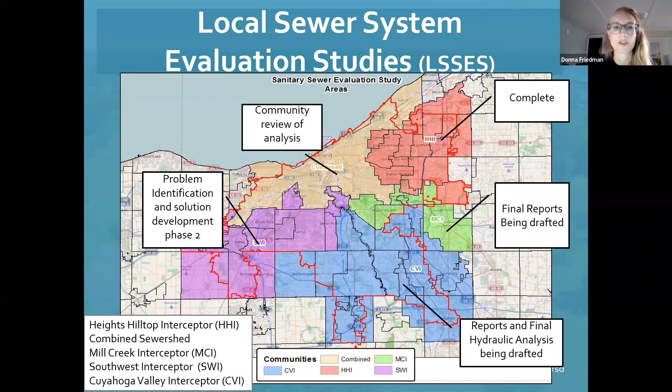These documents will also help provide some of the needed data to apply for the member community infrastructure grant dollars in future years.

Moving on to the member community infrastructure program, our funding for this program, which is within the wastewater budget, was reduced for the 2021 awards to $2.5 million. We are currently tracking a revenue decline due to COVID-19, and we'll be monitoring that as the year rolls on. There were 7 projects awarded for 2021.

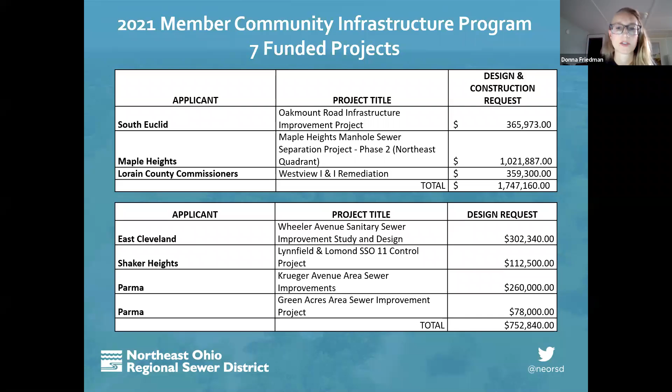3 were the classic MCIP design and construction application, and 4 were the newer type of application for design only, for projects that needed further vetting and investigation. If you did apply for funds for 2021, you should have received this information shown on this chart via email. These were the projects that were funded based on our scoring for this round of applications. We encourage you to continue to apply if you did not receive funding in this round.

We do anticipate funding of MCIP in 2022, and that will be determined by the rate study, as Frank was talking about. We also plan to continue with both application types. It seemed to be successful, and we got applications for both types, so there will be the design and construction and the design only option moving forward.

As always, if you have any questions about these slides, about community cost share, or SSES, your watershed team leader is your best resource. That'll either be me, Jeff Jowett, or Myron Borchards, and we're available to help you. My contact information will be at the end of this presentation.

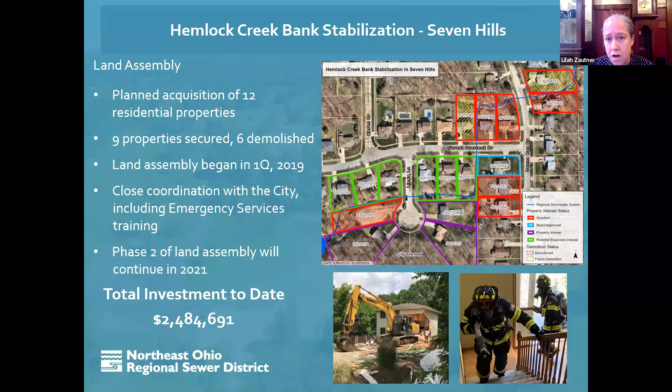So as we do land assembly in your neighborhoods, if you are interested in those opportunities, please reach out for us to consider that. Thank you. I'll now turn it over to Paul Kovalcik. Thank you.

Thanks, Lilah. Just to give you an update on how we help grant projects. In the past, the district has used stormwater funds to help leverage state and federal grant money to benefit the regional stormwater system.

Specifically, we made it a practice to provide grant funding or match funding for grants. This includes, but isn't limited to, EPA 319 funding, Sustain Our Great Lakes funding, Clean Ohio funding, and Coastal Management Assistance grants. For 2021 and beyond, we want to formalize the process for distributing matching funds for grants. We've designated $500,000 in matching stormwater funds available for grant-funded projects for 2021.

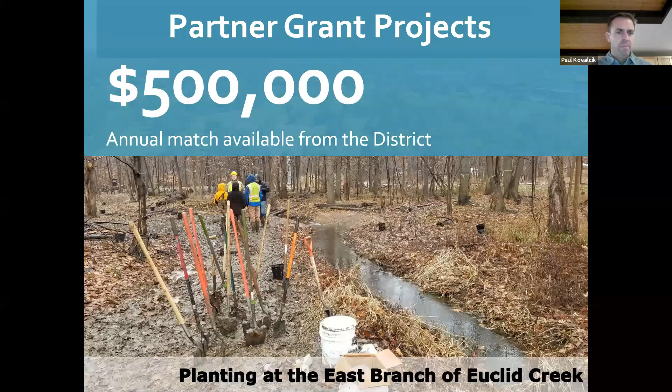We'd like people to keep their requests under $300,000 for each individual project.

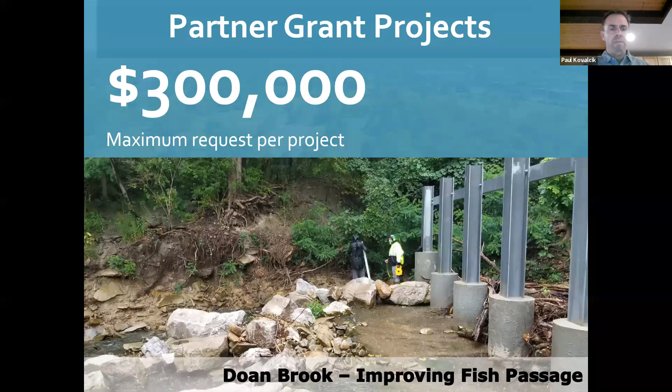What we'd like to see in each application package is a good project summary with some anticipated outcomes, a cost estimate with line item and unit costs and total cost of the project, a concept graphic showing the work area, hopefully along the regional stormwater system, and the dollar amount you're requesting from the district. You can use the 9-element summary sheets from the 9-element non-point source implementation plans as a template for your application. This is required for 319 applications anyway, but we'd like to see a little more detail from the cost estimate and project summary standpoint.

And then email it to me by the end of this year.

What we will do is nominate each application to our stormwater construction plan and rank them in our typical scoring system. Funding will be distributed according to rank, and we can be available to assist with developing concepts, sediment estimates, QHEIs, those sorts of things that might be necessary. We can provide in-kind services even if we don't award funds.

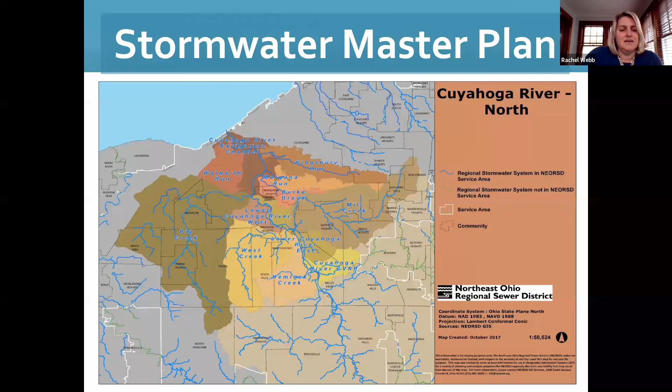Thanks, Paul. So Stormwater Master Plan, Cuyahoga River North. Just to give you an idea, it is done. Started in 2017, we are done now in 2020. I think with resounding success. I'll go into some more detail there.

We are 3/4 of the way done with our stormwater master planning for our service area. Rocky River is set to complete in November, leaving only the Chagrin River and Lake Erie direct tributaries to complete in 2021.

We ended up in the Cuyahoga River North Master Plan with 70+ problem areas. You can see a rough outline of those problem areas across the north boundaries there. All of those problem areas were nominated to our stormwater construction plan this year for scoring and ranking. So they're all in there.

It is a heavy lift. We're talking about over $500 million in construction cost for the north. I say that knowing it's a high level of service in these master plans, striving for a 100-year level of service with these recommendations for each problem area. As we move into the problem areas and look more closely, we'll probably modify that to a lower level of service, so you might see changes in costs. It's going to be a cost benefit analysis as we get into each area.

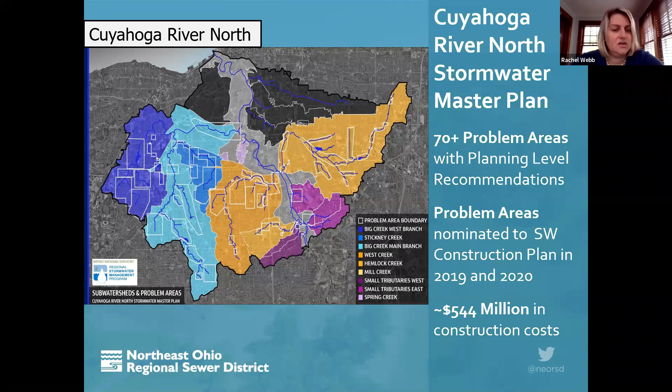The results of the master plan: we have a final stormwater master plan report, divided by sub-watersheds - Hemlock, Mill, Big Creek Main Branch, Big Creek West Branch, West Creek, Stickney, Mill Creek, and some small unnamed tributaries, and I probably missed one in that listing, but you can see a number of those sub-watershed reports have been generated.

There's also an inspection maintenance action plan. This goes to the Stormwater Inspection and Maintenance Group, and they look at the results in flooding for crossings and culverts, using those recommendations in how they do their inspection and maintenance activities. There's also, and I'll go into more detail, a plethora of data.

We have a lot of data generated through these master plans - inspection data, culvert inspection data, PACP reports. So there's a lot of information available, and we're putting all that together into our district GIS. I'll talk a little later about the availability of that data to you as communities as you need it.

There's also community reports, and this is what you are getting from your watershed team leader - a summary of the stormwater master plan analysis, what was done, and then the recommendations for your community, including problem area descriptions for each of the problem areas in your community.

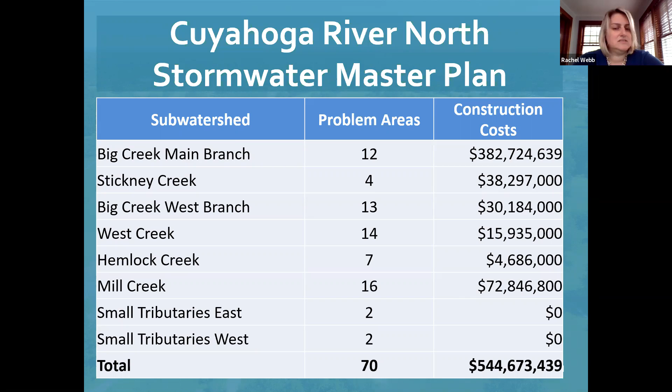Next slide, please. An example of what we've been doing with these master plan reports and recommendations - we have 3 projects that are underway right now in the Big Creek that resulted from the master plans.

We have a project looking at the culvert at Sprague Road in North Royalton. The image represents the Big Creek stream restoration upstream and downstream of Ridge Road. And then we have Ridgewood Basin in Parma - that project is just now kicking off.

So these are the results from the master plan that are being used, and that list will just get longer as we move down the line. Next slide, please.

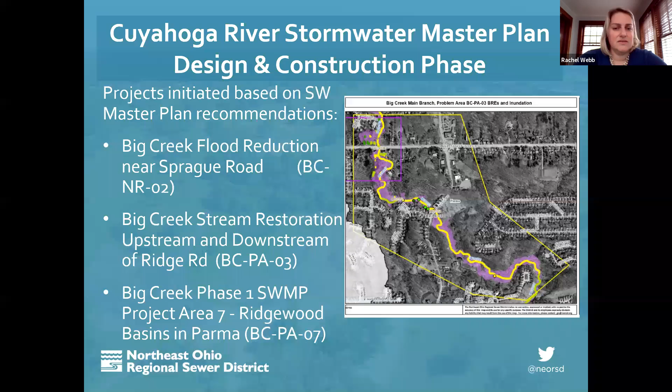As I mentioned from the master plans, there is quite a bit of data available for you as a community to use, not to mention the rainfall data we have available. Some of you have already talked to us or engaged with us and gotten some of the model information, some of the inventory, our CCTV for culverted streams. So if there's any of this information you're interested in as you're doing some of your own projects, I know we would love to share that with you and make it available.

All of that starts and ends with your watershed team leader and me in terms of the data. But the team leader is the best place to start, and they will forward it to me, and we will move on from there to get you the information that you need.

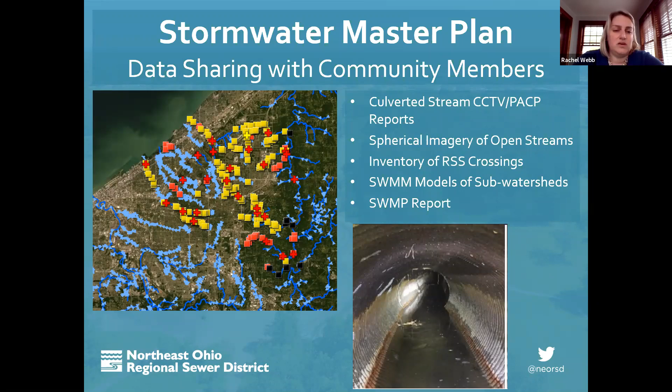So that's really a summary of the Stormwater Master Plan. As I said, it's wrapping up, so we're moving from this planning phase into the implementation of those recommendations. With that implementation, there is some more additional planning that we need to do.

This is not perpetual planning, but we do have problem areas, as you can see here, very complex problem areas that for specific reasons need some additional planning based on those recommendations.

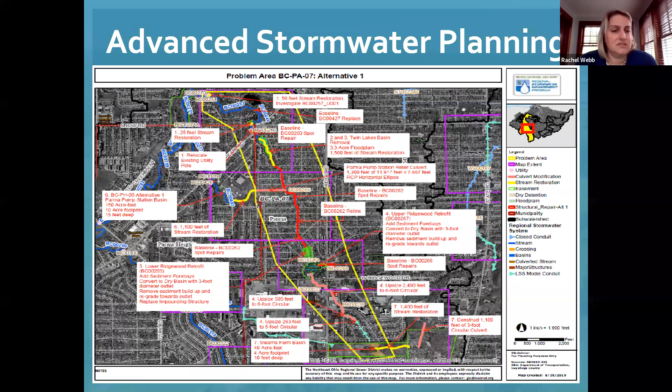An example of where we started with advanced planning is this problem area in Parma in Big Creek.

This is about 3 miles of regional stormwater system, but just under a mile of culverted stream.

We have 4 basins that are impacted in this problem area: upper and lower Ridgewood basins, upper and lower Twin Lakes. And this problem area cost is about $36 million.

As a problem area itself, $36 million is not something we can implement in one shot. So understanding the problems that we have identified through the master planning with structural issues with the culvert,

erosion along some of the open stream, we have some exposed utilities, and flooding of buildings and roadways. So understanding those problems and the goals of the recommendations to mitigate those.

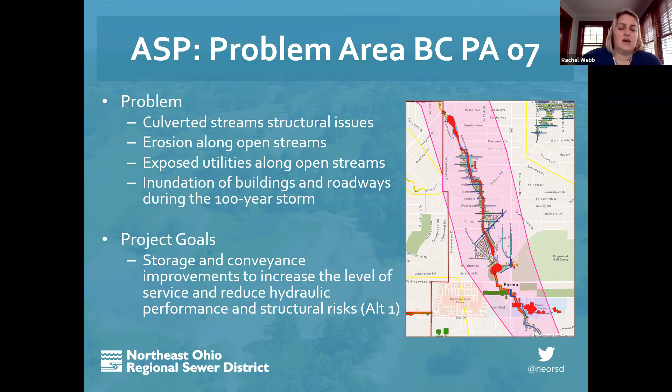We have about 7 major activities that were recommended under the master plan that you can see there for that $36 million.

Our goal with the advanced planning really is to accept those recommendations. So we're comfortable with the recommendations, but we need to break that apart.

We need to make that into smaller, more manageable packages. And in doing so, we need to do it in a way that is orchestrated, a defined sequence.

So we have the biggest bang for our buck starting off, where we can see the most reduction in flooding with a particular action. So how do we set that up and implement it over time to get the benefits that we want?

In addition, as I mentioned, we're also going to be reviewing the level of service goals to maximize the benefit versus the cost here. So those are kind of the three major points with the advanced planning.

So we can break it into smaller manageable projects, orchestrate it to have the most impact as we move forward with each package, and then look at the level of service goals to see where we can find more

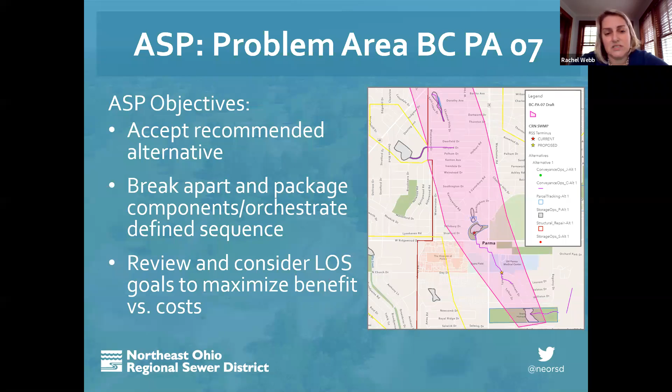of a sweet spot to bring that level of service up at a higher increment, but maybe not reach that 100-year level of service. So that is where we're headed with the advanced planning.

This is one of the first projects that we're getting started with, and that will be kicking off probably at the end of the month.

I believe I have now finished with my piece and am going to transition over to Jonathan Brauer to go over stormwater inspection and maintenance, unless there are any questions.

For today's stormwater inspection and maintenance update, we'll be talking about 4 areas of the SWIM program: our 2020 inspection program, our 2020 maintenance program, an update on our culverted stream inspections, and we'll touch on some highlights from the Labor Day storm event.

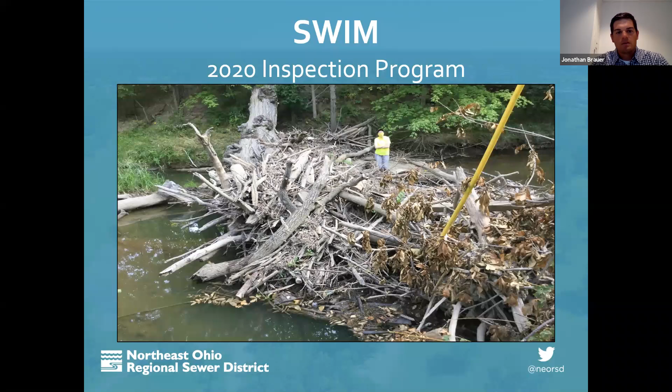Other entities such as the ODOT, the county, the national park, et cetera, who actually own and inspect their own assets.

So rather than duplicate our work, we'll be reaching out in the coming months in order to obtain those inspection reports from those agencies.

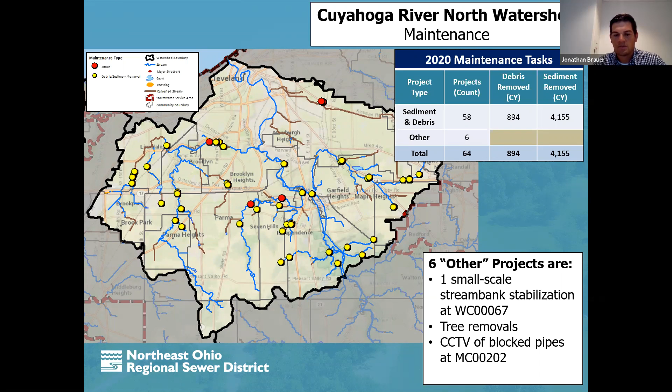We've also removed about 4,100 cubic yards of sediment. We've completed 6 other projects, which include a small-scale stream bank stabilization in Brooklyn Heights, a few tree removals, and some CCTV work in Garfield Heights.

Here's an example of the small-scale maintenance project that I mentioned previously. This is West Creek over in Brooklyn Heights at Lancaster Road. As you can see in the picture on the left, some right bank erosion was encroaching on the abutment footer of this bridge.

So our temporary solution for this problem was to install some soil-choked riprap, and we seeded it, and then also installed some live stakes just upstream of the footer that you see on the right.

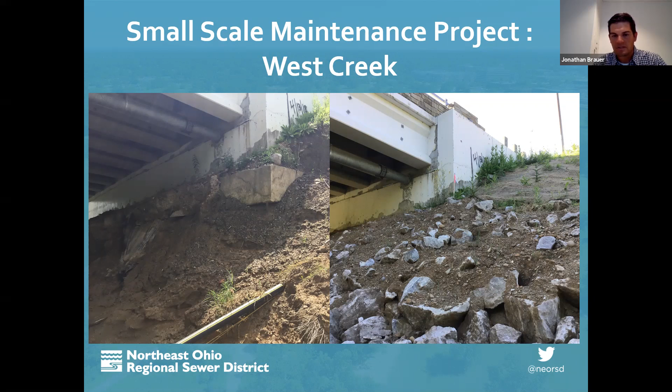Earlier this summer, in mid-August, we took on quite a large dredging project at the Kerruish Stormwater Detention Facility. It's on the border of Warrensville Heights and Cleveland, a regional inline basin plagued by a lot of sedimentation due to severe erosion upstream. Our debris and sediment removal contractor removed about 4,000 cubic yards to restore active storage volume. That material was stockpiled on site, is currently dewatering, and will be hauled off site at a later date.

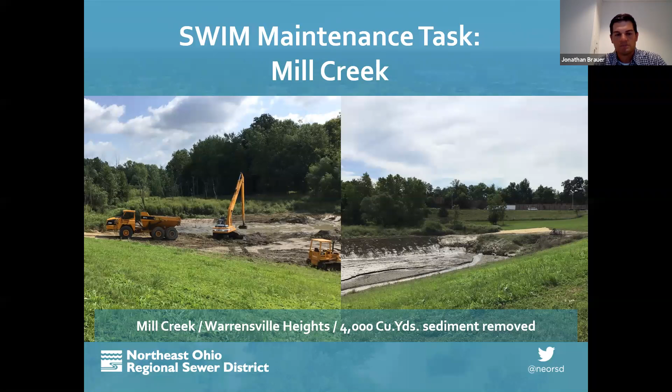Next, I'll touch briefly on our culverted stream inspection update. With the completion of many of the master plans throughout the service area, we now have valuable CCTV and PACP inspection reports from those master plan studies. So we're going through those reports and identifying problem culverts and culverts that we feel are a high priority for reinspection.

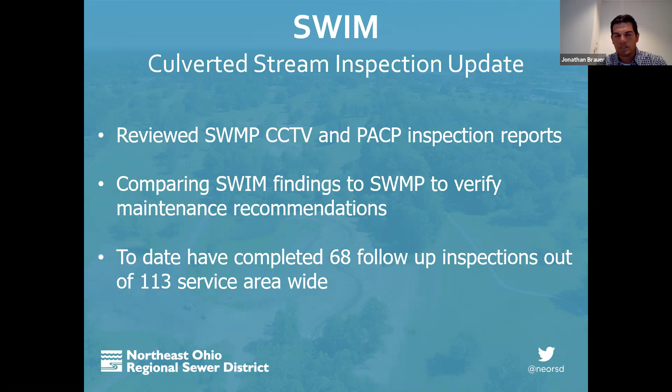We're actually going in and performing manned entries and CCTV work within the SWIM group. We're comparing our findings to the master plan and verifying those maintenance recommendations that were put forth. We've completed 68 out of about 113 culvert inspections service area wide, and 49 of those have been in the Cuyahoga River North subwatershed.

Just to give an example of some of the things we see when we're underground, this is a culverted stream, a corrugated metal pipe in Garfield Heights. In this case, you can see the invert of the pipe is perforated all the way through, and stream flow is actually entering those perforations and able to flow underneath the pipe.

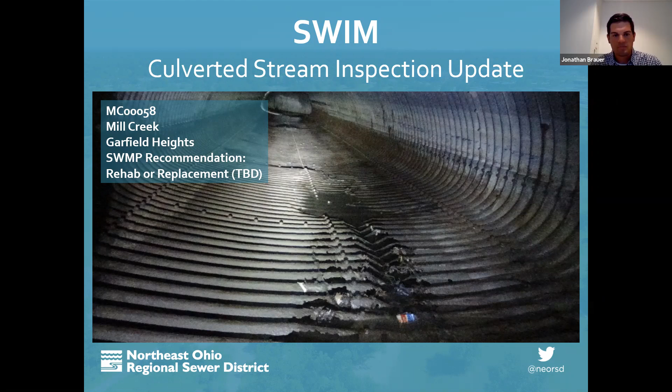Next, another corrugated metal pipe in Garfield Heights. As you can see, the invert is intact on this pipe, although heavily rusted, with heavy rust along the walls and the crown. In this pipe especially, we noticed severe degradation at a lot of the local tie-ins. There were about 21 tie-ins in this pipe that would need some form of rehab or replacement.

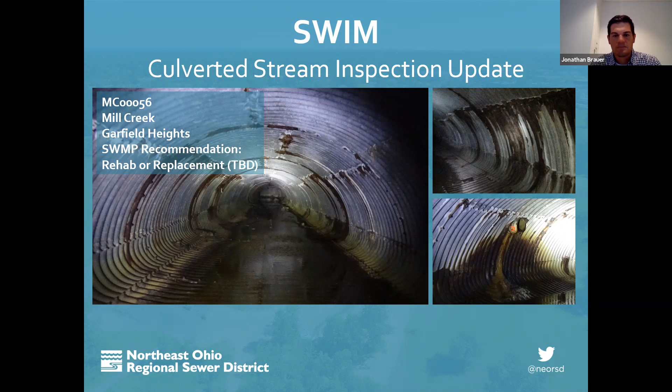Finally, we'll give some details on the Labor Day storm event. Depending on where you were in the service area, you may have experienced between 0.83 and 4.55 inches over about a 7-hour period. That equates to a 6-hour recurrence interval ranging from less than a one-year storm to just less than a 200-year storm, with an average of about a 25-year storm.

In terms of the 15-minute recurrence interval, however, the storm only put down about 0.32 to 0.81 inches of rain over that 15 minutes, which really equates to a very average type storm. So what we noticed was that the local system really was able to handle that 15-minute recurrence interval. A lot of that initial rainfall was able to saturate into the ground rather than run off. It wasn't until the rain just kept coming that we saw those reactions in the larger regional streams.

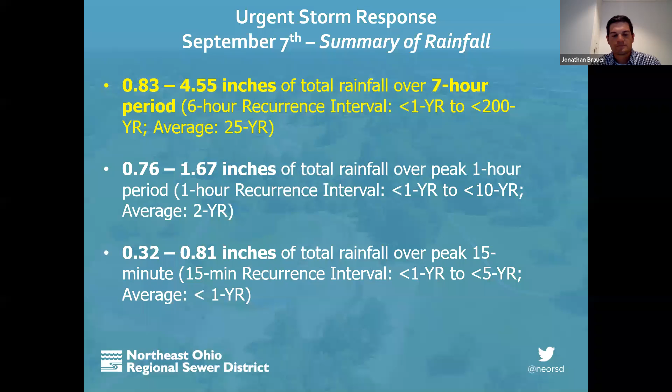In terms of SWIM's response, our inspection staff was able to complete about 90 inspections. Maintenance staff responded to 29 maintenance work orders, removing about 812 cubic yards of debris at a cost of about $86,000. We also received 18 customer calls. Comparing the September 7th storm to the March 30th storm, we did complete a few more inspections than March. However, our maintenance projects and cubic yards removed both decreased pretty significantly.

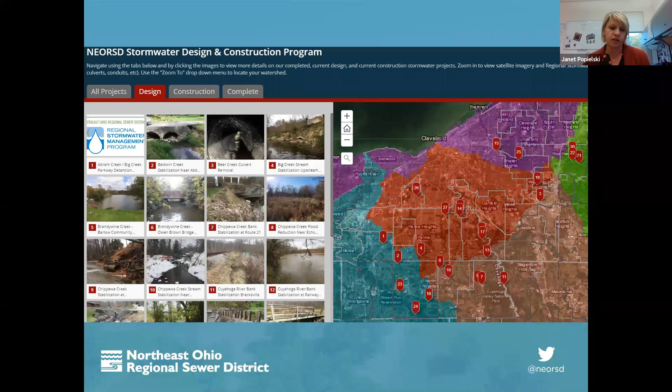Moving on to some of the work that we've been doing in design, I'm actually going to highlight a project that's completed. This is Stickney Creek in the city of Brooklyn by Ridge Road.

This was a project that we've been working on for a couple of years. We did it as a design build. This part of the creek had an exposed intercommunity combined sewer in it — the actual sewer was in the creek. Water was going from the creek into the sewer, and most likely vice versa as well.

We consider this to be a very successful project, a great example of what we can do with the regional stormwater system to address the root problem, which was the exposed sewer, but also improve the entire system. The resident who took the first picture told me that usually that crossing would have overtopped in this type of event, but this time it didn't. So we definitely were able to gather more storage in there.

Next slide. One of the projects that we're finishing right now, and actually has been bid out, is the Pepper Luce Creek at Lander Road in the city of Pepper Pike. This project is aimed at arresting stream bank erosion and also protecting some utility assets. There's a septic system that's being eroded into.

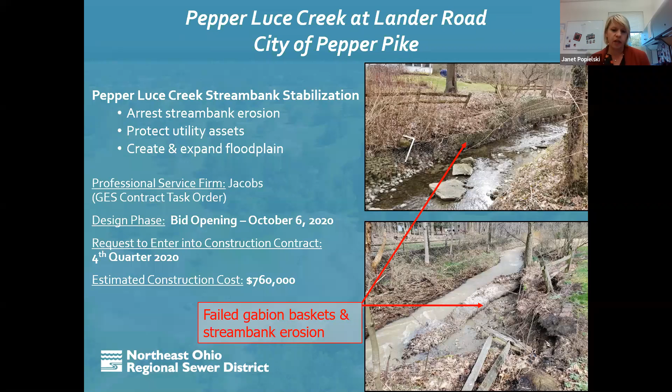Next slide. Another one that we've just completed the design on, and our board awarded it today, is the Ridge Road Repair and Rocky River Tributary Stabilization in North Royalton.

This is a great example of where a stream had been eroding into the roadway. You can see in the upper picture that it was into the pavement. The guardrail was actually just hanging off, and the posts were completely exposed.

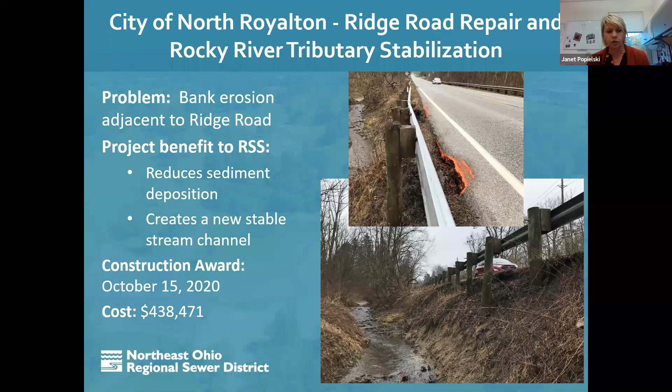If you go to the next slide, the approach that we decided to take, rather than just armoring the embankment, the toe of the embankment, and trying to protect the road, was actually to address the root cause of the problem, which was that the stream shouldn't have been that close to the road in the first place.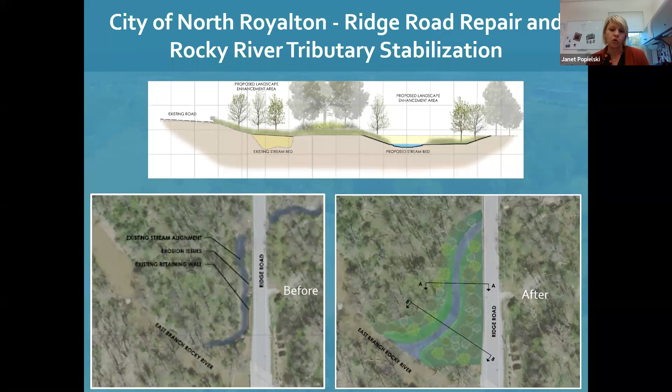So working with private property owners, we acquired easements in order to move the stream away from the roadway, create more floodplain, and provide more benefit to the regional stormwater system. Next slide.

The Chippewa Creek Bank Stabilization near Broadview Road in Broadview Heights is also aimed at addressing stream bank erosion and protecting a local sanitary sewer. We'll be relocating the stream away from a very large gabion wall that you can see in the lower picture, which is holding up an apartment complex parking lot. This project is in the final stages of design, and hopefully we'll be bidding it out next year.

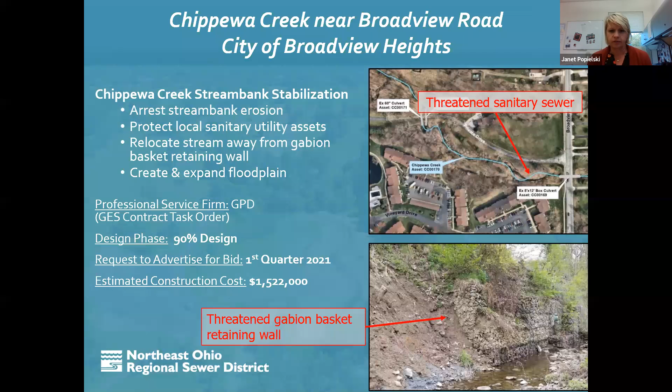The Big Creek Upper Ridgewood Basin modifications is one portion of a project that Rachel highlighted earlier. This is a great example of where we have a very large project area, but we know there's an opportunity we can move forward with right now. The Upper Ridgewood Basin is a city-owned basin, and we'll be looking to expand it to increase capacity and reduce downstream flooding. As we move through advanced planning, we'll identify other areas where we can continue to do work in this larger area.

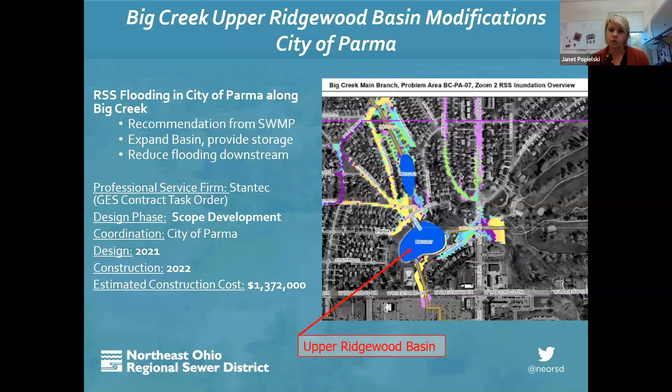Next, just to highlight a couple of the projects that we currently have under construction.

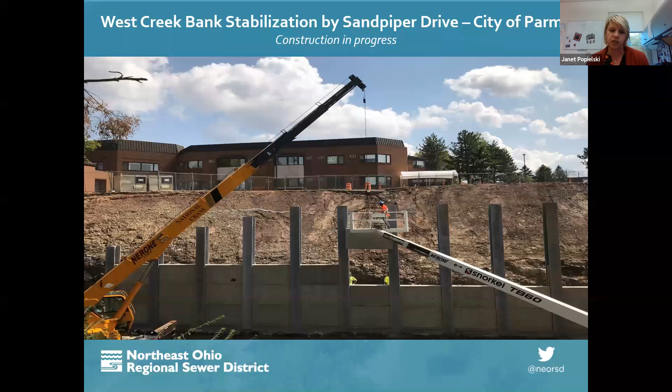One is the West Creek Bank Stabilization in the city of Parma near Sandpiper Drive. The West Creek itself was eroding into a parking lot and drive access for an assisted or skilled nursing facility, and it was actually starting to threaten the ability for ambulances to come in. A lot of times we don't have enough room to relocate the stream or widen the floodplain, so we do have to put in soldier pile walls. This was definitely one of those instances where all the neighboring development made it impossible to do a different type of project. But we do look to capture as many benefits as we can for the regional system, in addition to protecting the building.

The final project I'd like to highlight is the Doan Brook Culvert debris removal. This project came to our attention after some of the flooding that University Circle had experienced in the past several years. It was determined that there were two debris blockages within the Doan Brook culvert that were lowering the level of service from a 10-year down to a 2-year.

One of the debris blockages was removed during an earlier project because of its close proximity to the outfall of the culvert, but the second one was 1,500 lineal feet up into the culvert. After we realized through the Stormwater Master Plan the impact of this debris on the level of service, we decided to move forward with it.

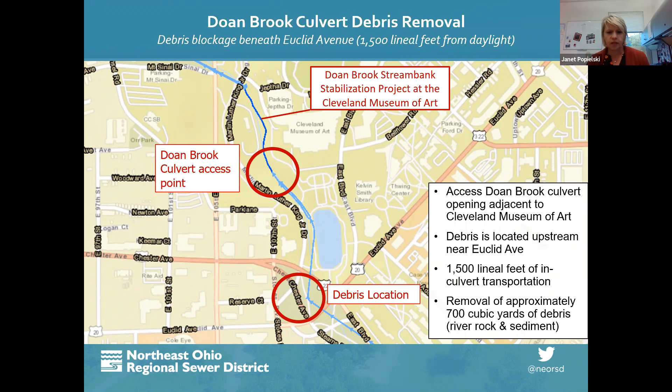This is the debris that we'll be removing, and this will probably be a pretty long process. We have to go 1,500 feet up into the culvert with small equipment, and they do have to work in the wet. But again, if we can increase the level of service by that amount by removing some debris, then we're going to go ahead and do those projects.